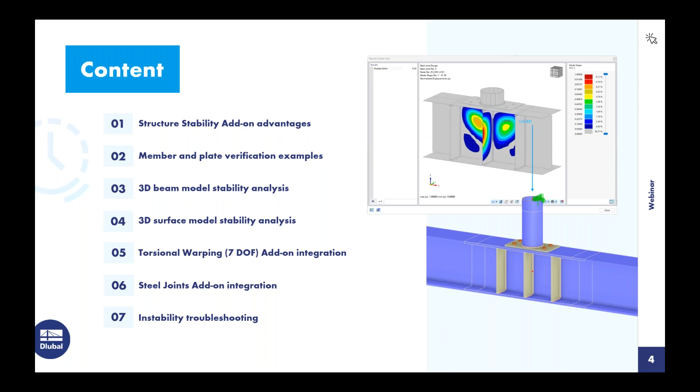To begin, when looking at the structure stability, this is an optional add-on within the RFEM 6 program. This allows us to run an eigenvalue analysis to determine the critical load factors and eigenvectors, or in other words, the buckling modes of our structure. Therefore, we can evaluate the stability of the structural system and regions prone to buckling. So when we're talking about regions prone to buckling, we're typically referring to very slender beams or columns, or thin-walled shell or plate elements.

Everything that we'll be carrying out today will be according to a linear eigenvalue analysis, which we'll talk a little bit more about in the next slide. But keep in mind that a nonlinear stability analysis is also available, where we can increase the load increments to see the failure of the structure. As already mentioned, not only can we look at the buckling modes of the structure, but we can carry out instability troubleshooting to locate modeling errors with a load-independent eigenvalue analysis.

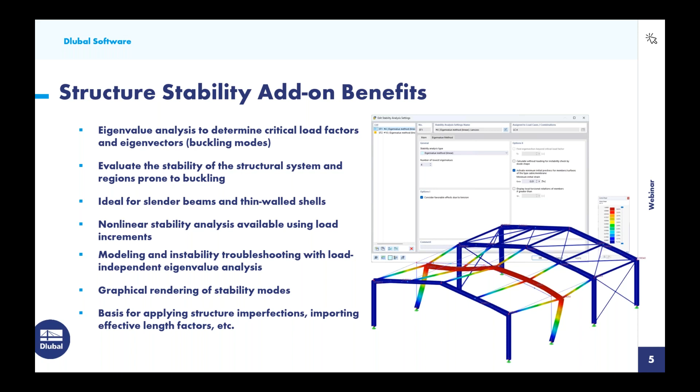Through all of these examples we'll see, we'll see the graphical rendering of the stability modes as we see over here on the right-hand side. Then we can integrate for further capabilities within the static analysis, such as applying structure imperfections. We can import effective length factors, and we'll see those carried out in the further design examples.

Now, when we do activate this add-on, we have 3 analysis types available to us. The first is the eigenvalue method, or a linear analysis, and this is essentially where the buckling modes are determined through a linear method. If we have any nonlinearities defined, either material or geometric nonlinearities within the model, these are internally converted to linear elements in order to carry out the stability analysis with constant stiffnesses.

Now, alternatively, we do have the incremental method with an eigenvalue analysis. This is nonlinear and will take into consideration all geometric and material nonlinearities. Essentially, we will carry out the failure criteria and nonlinear effects, and these will be included during the incremental loading increase. We will find the last stable state with this nonlinear analysis to carry out the linear stability analysis, or the eigenvalues.

The third option here is the incremental method without the eigenvalue analysis, also nonlinear. This is identical to option number 2 with those nonlinear analysis capabilities—we simply won't carry out the eigenvalue analysis within that last stable state. So with all of our examples today, we will be utilizing the linear eigenvalue method, but just keep in mind, if you do have those nonlinearities, the add-on is also capable of utilizing these nonlinear options.

So as we look at this example within RFEM 6, our main base program, we can see this W section profile with the 100 kip load applied at the top, the pin-roller scenario, 12 feet high. We want to activate the structure stability add-on, which we can do within our toolbar by accessing our base data, or by right-clicking on the model name to access that base data dialog box. Under the second tab are all of our available and optional add-ons, and for today we're going to be utilizing the structure stability add-on.

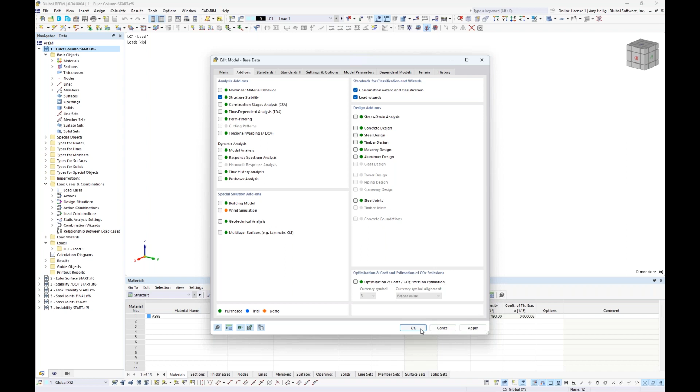When I click OK, pretty much nothing changes within the model itself, but we can go into the load cases and combinations dialog box. I currently only have one load case defined with that 100 kip load applied at the top of the column, and this will be carried out according to a first order static analysis. But we can activate the structure stability add-on with this checkbox down here at the bottom.

Looking at the default definition types, you'll notice there are two definition types immediately set. The first is an eigenvalue method linear analysis, which we should recognize from the PowerPoint. We'll go ahead and carry out that linear analysis for today, and then we can set the number of eigenvalues to solve for. The default is 4, but we could increase or decrease this manually depending on our model. The second default setting is identical, just with a higher number of eigenvalues set to 10 by default. So carrying out the linear analysis with 4 eigenvalues, we'll go ahead and click OK.

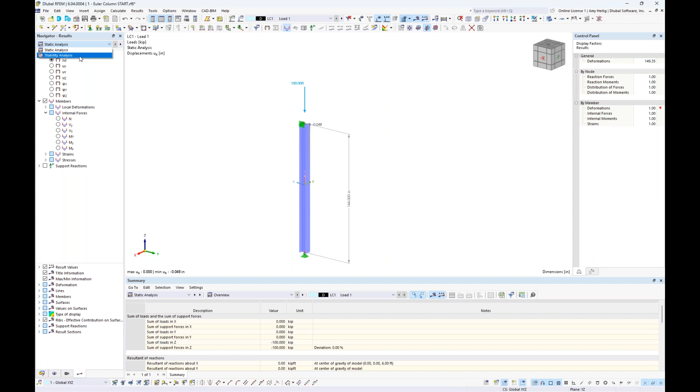To run this calculation, we're going to initially calculate the static analysis with this first load case, but then you'll notice we carry out the second calculation for the stability analysis. We're not so interested in the static analysis results; instead, we jump immediately to the stability analysis results now available to us in our navigator. When we look at the results here for the structure stability add-on, we see 4 different eigenvalues that we have solved for, and within the table we also see the critical load factor given.

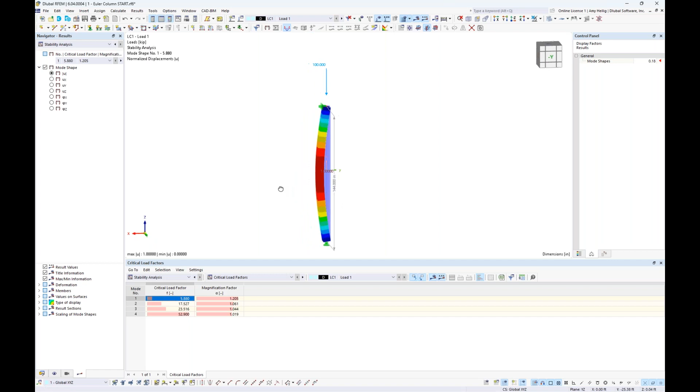The critical load factor for this first buckling mode shape, which we can see is buckling out of plane in the weak axis direction, is the factor that we can multiply the applied loads by—in our case, 100 kips—before we see the structure fail, as shown here with this first buckling mode shape. The second mode shape is buckling in the strong axis direction, and as expected, we see a higher critical load factor of 17.527. Again, we multiply this factor by the 100 kip applied load to determine the critical buckling load.

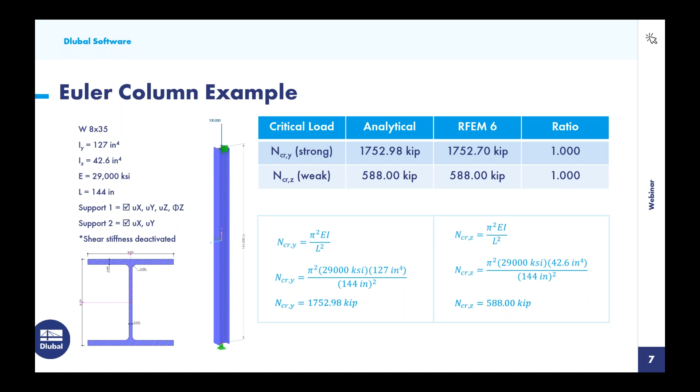So we take this information back to the PowerPoint to compare to the analytical calculations we've carried out within this slide. We can see that compared to the Euler buckling formulas, the RFEM 6 comparison gives us a ratio of 1.0. So I think it's important to understand how we're carrying out this structure stability for simple flexural design here for the stability modes.

Moving on to our second example, this is really very similar to what we just saw with our column, yet this time I wanted to utilize a 2D surface element. Members by default are represented by a single line element. Surfaces, on the other hand, are two-dimensional.

So we go into RFEM here to open up this example. And as mentioned, this is a two-dimensional surface, so we have 10 inches wide, 50 inches tall. I have left on the display here of the FE mesh, so you can see how the structure will mesh this for this two-dimensional object. We also have a 1 kip per inch load applied at the top here.

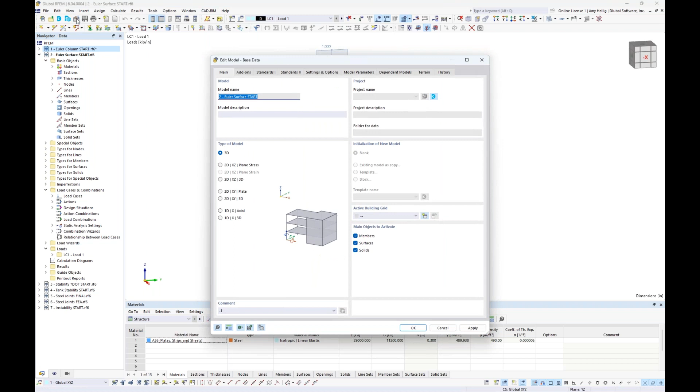So very similar to the column, we want to go into the base data, and we can do so within the toolbar directly to activate, under this second tab, once again, the structure stability add-on. We go into our load cases and combinations, and for this example we have our single load case here with the 1 kip per inch applied as a line load at the top of this 2D surface element.

We want to not only carry out the static analysis, but also the structure stability analysis. We'll go ahead and leave these default settings here for a linear analysis, carrying out 4 eigenvalues, and we can run this calculation. So the program would initially mesh a structure if we didn't already have it. It will carry out the static analysis, and then we move on to the stability analysis.

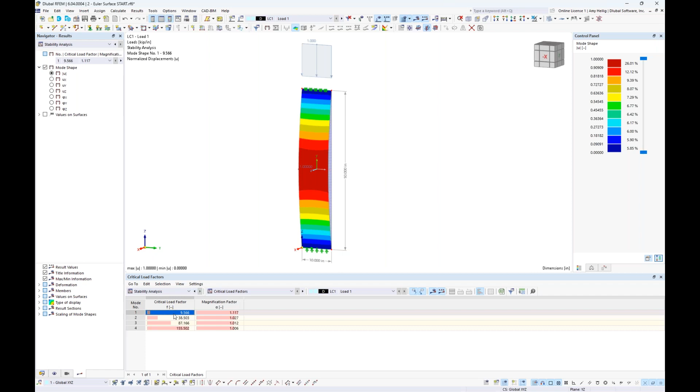So taking a look at our stability analysis results here within our dropdown, we see our 4 different mode shapes. The first mode shape you can see here is buckling out of plane for this 2D surface element, with a critical load factor of 9.566. Taking a look at these additional mode shapes, we can see the deflected shape, but the critical load factor here is much higher.

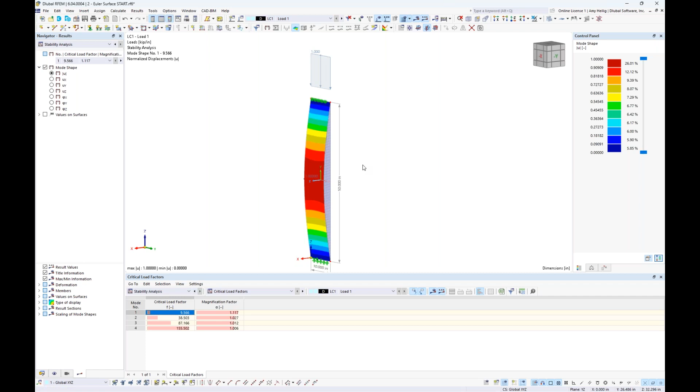So in reality, we're most concerned with the lowest critical load factor. Again, this factor, 9.566, is what we can multiply the applied load of 1 kip per inch by before we would expect to see structure failure, or the buckling here out of plane.

Again, we take this information back to the PowerPoint here to compare to the analytical formula, and we find a ratio of 0.997. Okay, so that should give us a better understanding of the basic behavior of this structure stability add-on for a simple beam and a simple surface.

Now let us go back into RFEM here to open up our third example. This one should be a little bit more interesting, where we have a 3D structure that is composed entirely of beam elements. So you can see that all of these are member elements for our columns, beams, and braces, represented by a single line element here. So no surfaces for this particular example.

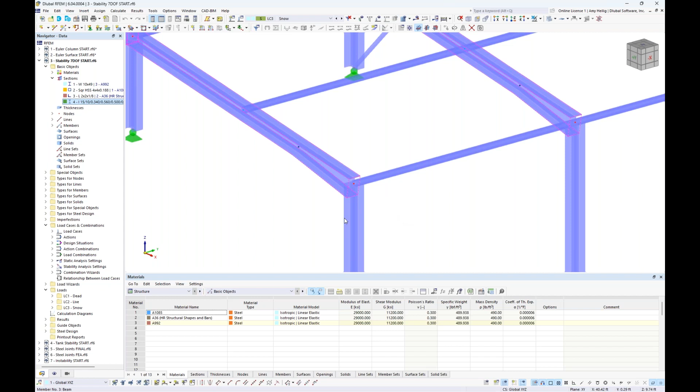If we want to do a quick overview, the cross sections are from the AISC database. So we have W10 by 49s. We have some square HSS sections spanning between these moment frames, single angles for our cross braces here, lateral bracing. And we also have a very small taper for this beam member, in particular at 25% of the member length before it frames into the vertical columns.

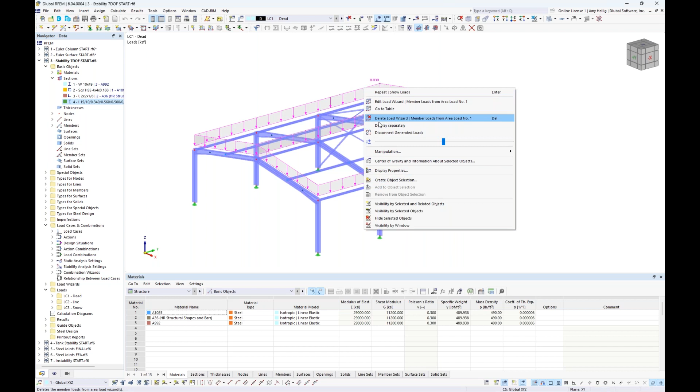Now, to quickly take a look at the loading for this example, I have only 3 load cases defined. So we can view these loads here, and these are just general area loads created with the load wizard for dead load. If we're curious to see how the load distribution looks, we can right-click to display separately, and notice that I have created a one-way area load distribution so that the loads are mainly on these main beams here rather than the HSS spanning in the global Y direction.

We can also view here the live load, same concept. If we want to view the area load instead, we can see this shown here on the structure with a varied magnitude.

And finally, we have a projected snow load in the vertical direction. So for this example, I have applied only gravity loads. I think it's important to understand that when we're talking about the buckling behavior of our structure, we want to evaluate the worst case scenario where we have the highest compression forces in our members. For example, in our column elements, we want to see the highest forces acting in the downward direction. This is typically with gravity loads.

If we were to include wind uplift forces, this is only going to do us additional favors in terms of the buckling behavior, because now we have introduced additional tension forces in those members. So again, when we are evaluating the structure stability, we really want to look at those downward compression, possibly gravity only loads. I have additionally combined these load cases into load combinations according to ASCE 7.

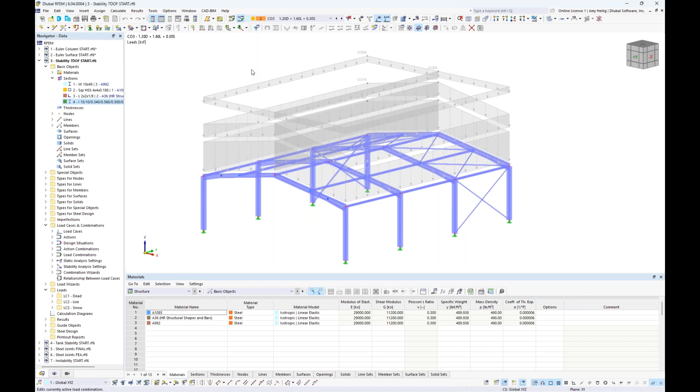We can see those displayed here graphically along with the relevant load factors. I'm going to go into my load cases and combinations. Now, we certainly could activate here the structure stability for each individual load case, as we did in our previous simple examples. But instead, I'm interested in carrying out the buckling analysis for my load combinations instead, where I have combined all the load cases together.

Now, the program by default creates 2 design situations based on the ASCE 7 2022 in this example. You can think of a design situation as simply grouping together all of our factored load combinations. We can see this here, LRFD according to the ASCE 7, as well as our second design situation, which groups together all of our unfactored load combinations. This will eventually give us an envelope solution for those factored and unfactored load combinations together.

Under the combination wizard settings here, I can go in and you'll notice that everything is solved here for our load combinations according to a second order analysis, but we have the ability to activate the stability analysis here directly within the design situation. These default settings are identical to what we saw previously within the load cases, that we can carry out the linear analysis, and perhaps I increase this to 10 different eigenvalues to solve for this structure.

So now that I have activated it within the design situation itself, I take a look at the load combinations individually listed out, and I can see now by default that the structure stability add-on is activated here. That's just simply because I have activated that checkbox under the design situation itself. Now, by all means, we can come in here and individually carry out the structure stability for each individual load combination as well.

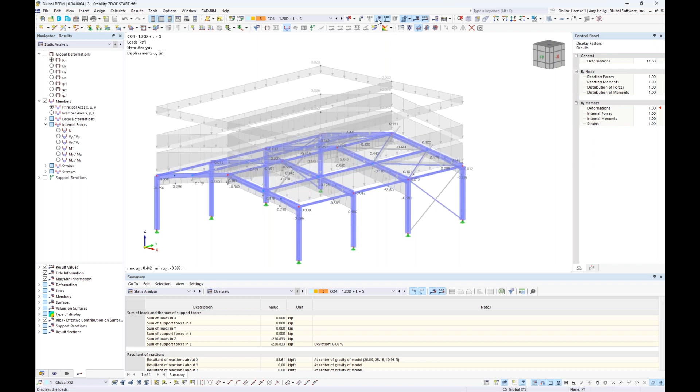So when we toggle this drop down to the design situation for our factored load combinations, again, this is nice because it's more or less an envelope solution for the static analysis. But you'll notice within this table here that shows our static analysis results for this design situation, we have the stability analysis envelope solution as well.

The minimum critical load factor is 10.532, and the controlling load combination is load combination number 3.

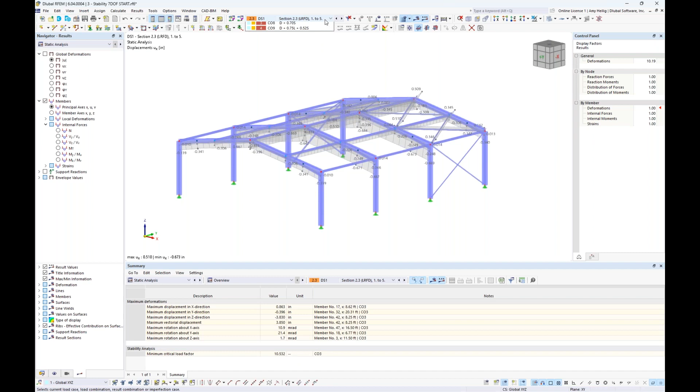So this is kind of nice that, again, we don't need to run each individual stability analysis for each load combination and to manually check the results, but the program will give us the controlling load combination here. So we toggle down just to display the loads for load combination number 3, and no surprise, this is certainly going to be the controlling case because we have all 3 loads activated with the highest load factors to give us the greatest compression forces in our members.

So we will toggle down to the stability analysis results for load combination number 3. As we have input into the program, we had solved for 10 different mode shapes. Starting with mode shape number 1, we kind of see a racking here of this initial moment frame with a critical load factor of 10.532 as we were shown here within the design situation itself. Essentially, we're going to see here the flexural buckling in the strong axis direction of these columns.

Looking at some of the additional mode shapes, we can see similar behavior just in different locations of the structure with a higher critical load factor. As we continue to increase, we may start to see more localized mode shapes. What I mean by this is where we see the individual buckling of these columns, in particular in the weak axis direction. Whereas compared to the mode shape before, this is maybe more of a global mode shape that kind of affects the structure together.

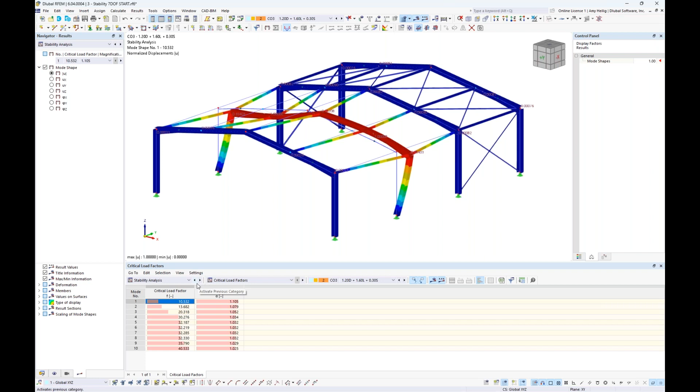Okay, so now that we are looking at mode shape number 1, let us focus in on this particular column here, and this is member number 10. When we are looking at the stability analysis results within the table, we can use this drop down to view the results by member. So when I graphically click on this member here, the table updates to show me member number 10's results.

We have 10 different mode shapes shown here. In particular for this first mode shape where we have failure of this column in the strong axis buckling, we can view the equivalent effective length factor, that K value, which is given as 3.012 in the strong axis direction. We also see here the effective length of 34.64.

So if we plan to take this a step further and to design this structure, let's say according to the AISC or the CSA standard, and in particular according to the AISC, we want to design it utilizing the effective length method. The effective length factors are really important. So we have the ability to get that information directly from the failing mode shape here.

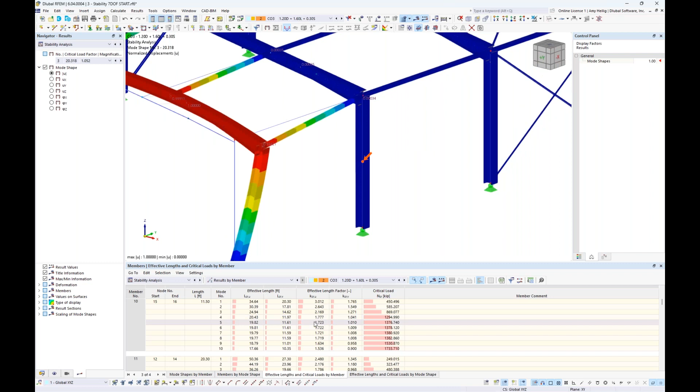Now, when I take a look at these additional mode shapes, they're really not affecting member number 10 until I get down to mode shape number 7. Here we see the failure in the weak axis direction for member number 10. We see the relevant effective length factor in the weak axis direction given as 1.008 and the effective length as 11.59.

So assuming that we have already activated the steel design add-on within RFEM to carry out the steel design according to the AISC, information such as the unbraced lengths or effective lengths are always needed in order to carry out that design. And we do so by inputting the effective length for the member directly.

And I want to show you a nice feature here that, assuming again that we're carrying out design according to the AISC with that steel design add-on, we input our first effective length definition where you have the ability to import from the stability analysis. So when I turn on this checkbox, I get a new tab here where for the strong axis direction, for consideration of, if we go back here to the main tab, flexural buckling about the major axes, we can import that effective length factor directly from the stability analysis.

So we choose here load combination number 3. We will choose mode shape number 1, and we can either graphically select member number 10 or choose it here within our dropdown, and notice that that effective length factor is automatically brought in as 3.01.

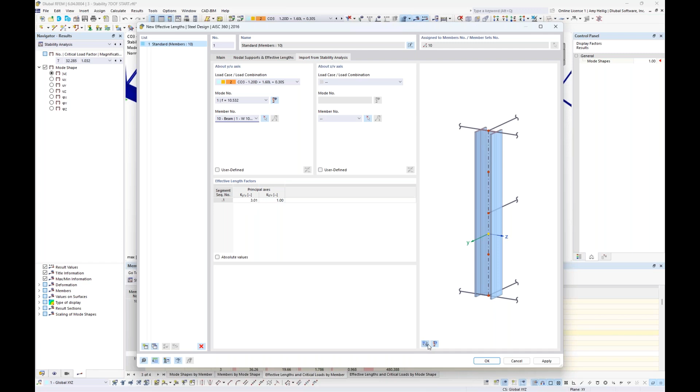We can do the exact same thing for the weak axis direction. Again, this is specific for member number 10. We will choose load combination number 3, but this time we want to choose mode number 7. Remember, that was where we saw this column fail in the weak axis buckling direction, again for member number 10. We see that effective length factor brought in automatically as 1.01.

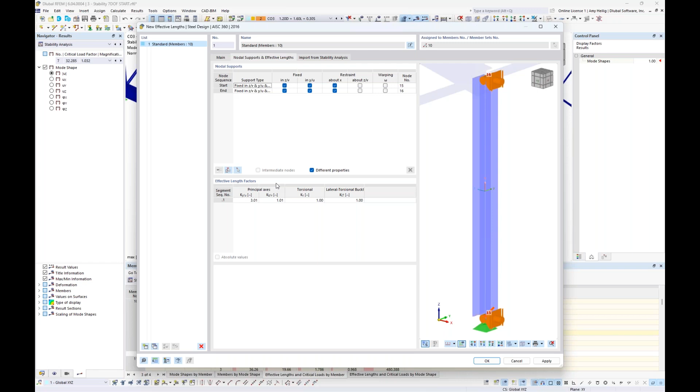So we don't need to do anything further here in terms of the effective length definition for flexural buckling in the strong and weak axis direction if we integrate this with the structural stability add-on.

Okay, so now that we have covered the basic stability mode shapes here, keep in mind that everything that we have seen so far has been based on 6 degrees of freedom. And with 6 degrees of freedom in these various mode shapes, we notice that we're really only able to consider flexural buckling. We certainly can see this with the mode shapes directly with flexural buckling failure of the columns themselves.

But if we back up a step to look at the static analysis results or the internal forces from load combination number 3, what we'll actually see here is that we have pretty high bending forces along the length of our members. And when we look at our columns, we have pretty high axial forces, of course. When we're talking about these bending forces, for example for these beams, this should immediately flag us that possibly lateral torsional buckling is an additional stability failure state that we need to consider.

So let us go back to the PowerPoint here to discuss these different stability failure modes. Now, we should be very familiar with flexural buckling by now for our members. Ultimately, there's some critical buckling load for the strong axis and the weak axis before we see this member fail with flexural buckling.

But there are also additional failure modes such as torsional buckling, which has some other critical buckling load factor before we would see this member twist about its longitudinal axis. This might be quite common for something like a cruciform section.

Then we also have flexural torsional buckling. When we have an applied axial force to the member on something like a single angle that's unsymmetric, we're not only going to see flexural buckling, but it's also going to be twisting about its axes.

And of course, lateral torsional buckling is also a consideration when we have a bending moment along the length. So something like singly symmetric or unsymmetric sections, we're not only going to see it move out of plane, but also twist about its own axes. The problem is that 6 degrees of freedom can only consider flexural buckling.

Now, we can go ahead and say, well, if we are designing according to AISC or CSA, the codes have analytical equations that are going to design for these additional stability failure modes. But this is in the design process. What I'm talking about specifically is the static analysis as well as the structural stability.

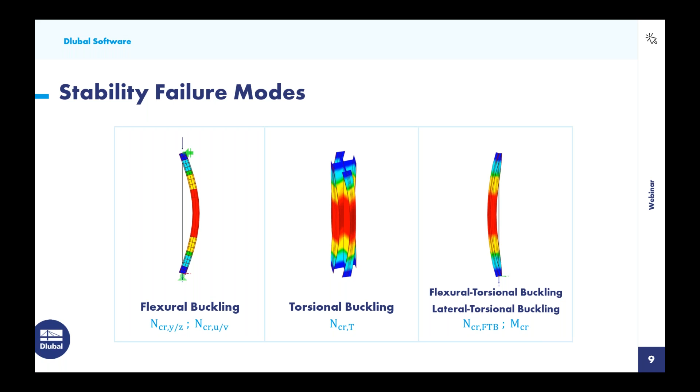So how do we consider these additional failure modes? The answer is to enable the 7th degree of freedom, or warping. We have an additional add-on within RFEM 6 called Torsional Warping 7 Degrees of Freedom. This allows us to consider the cross-sectional warping with an additional degree of freedom for member calculations.

What's nice is that everything is integrated automatically, including both the static analysis and the structural stability add-on, to determine additional member critical load factors and mode shapes. Again, 6 degrees of freedom can only consider flexural buckling failure. That's everything that we have seen up until now.

I did want to put a quick note here that also with 6 degrees of freedom, the load application is always at the member shear center. So now when we enable that 7th degree of freedom, we can additionally capture the torsional, flexural torsional, and lateral torsional buckling behavior. And when we do enable that 7th degree of freedom, we get a load application at the center of gravity, or centroid, of the member instead. What we will see in just a minute is that when we do enable this add-on, we get additional options available to us, such as member transverse stiffeners to restrain the warping along the member length.

Now, currently in RFEM 6, the 7 degrees of freedom is not linked in the steel design add-on when we're carrying out steel design according to AISC or CSA.

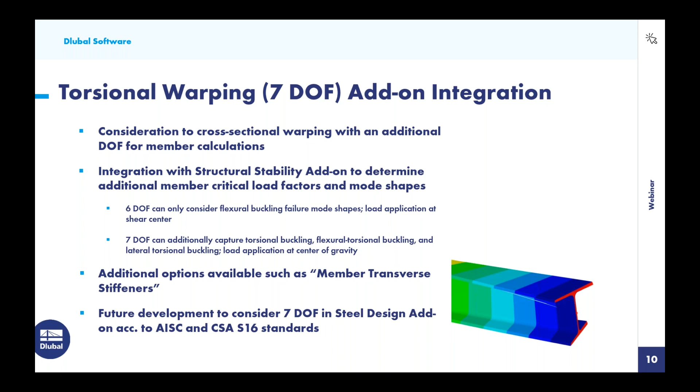Okay, so what we will do here is go back to the RFEM model, and we want to go into the base data here. Under the second tab, we will activate now not only the structural stability, but the torsional warping 7 degrees of freedom. When I do this, the program says it needs to delete the results, of course, because that was all based on 6 degrees of freedom.

Now, by default, all of our members are considered free to warp. There is no warping restraint along the member length. In addition, if you would like the warping internal forces to be transferred to adjacent members, it's important here to create what we call a member set.

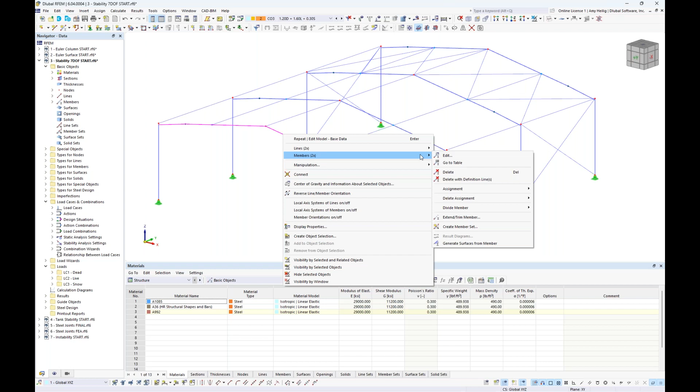So what I mean by this is that if we want the warping forces with the 7th degree of freedom to be transferred from, let's say, our beam on the right over to our beam on the left, we would need to hold down our control key to make sure both are highlighted here. We right click, and under the member option, we have the ability to create a member set. So that's just simply grouping those members together so that those warping internal forces will be carried out to adjacent members.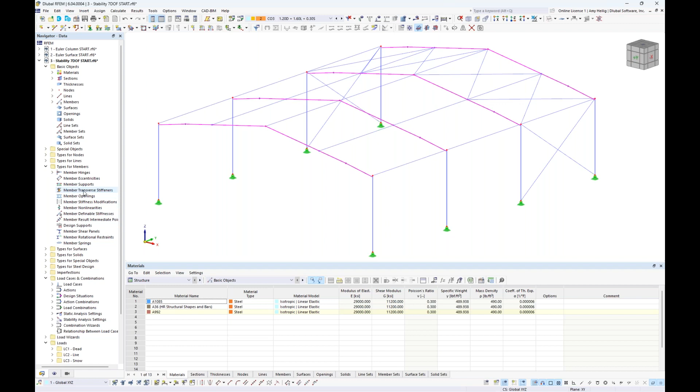Now, circling back to the warping restraints, we should see now under types for members, we have a few additional options here, including member transverse stiffeners. So I'd like to double click on this to create a few stiffener types for these members in order to restrain the warping at the member start and at the member end. And within this dropdown, we actually have several different stiffener types.

For example, we can choose a flat plate where we could input the material and dimensions, and the program will automatically calculate the warping spring to be considered within the analysis.

For today, we will use this option at the bottom called warping restraint, where we use the full warping restraint, and apply this to the member based on a certain percentage of the length. So I'm going to activate this warping restraint at 0% of the member length, the member start, and add a second warping restraint at the member end, at 100% of the member length.

Then we can graphically select which members we'd like to apply this warping restraint to. I'll use my selection box to graphically select all of those main beams, then click OK. Once I click OK through this dialog box, you'll notice we get a nice symbol shown here representing where that warping restraint is located at the member start and the member end.

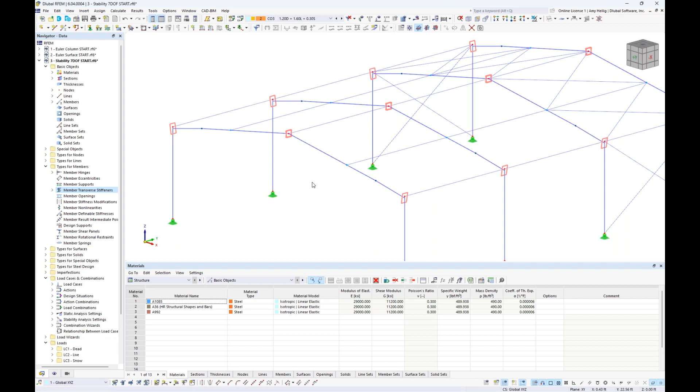Now we want to go to Calculate All, and we have to rerun the static analysis with 7 degrees of freedom. So we see the load cases carried out, but also those load combinations according to a second order analysis. Then we run through the structure stability again for all load combinations, and we should see slightly different results.

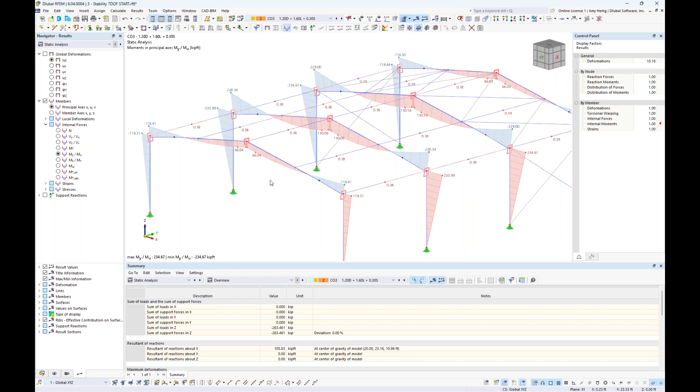Taking a look at the static analysis results, where we can view the internal forces of our members, you'll notice we have a few additional options now with that 7th degree of freedom. For example, we can view the warping moment along the member length, or the primary torsional moment and the secondary torsional moment. This previously was not available with 6 degrees of freedom.

Toggling down to our stability analysis, we also should see pretty significant or different results here as well. No longer do our 10 different mode shapes look like what we previously saw with 6 degrees of freedom, but we see here the critical load factor is now...

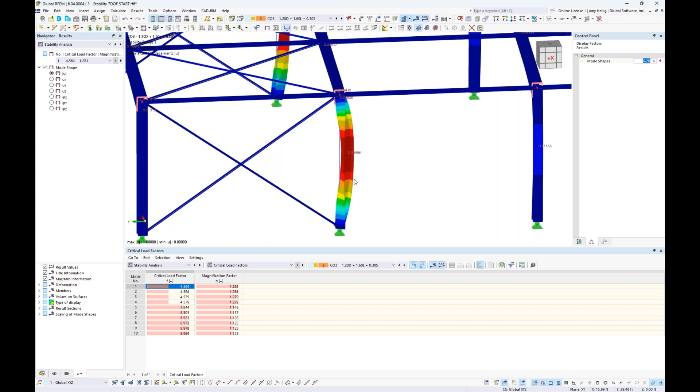4.564, and our relevant mode shape is really focused here on these columns. We can increase the size of this mode shape ever so slightly to see how this column has essentially flexural torsional buckling, where it is both bending out of plane but also twisting about its own axes.

So you can see that with the critical load factor, it's significantly decreased. Previously it was around 10.5, and now it's only 4.564 before we go on to see the relevant mode shapes here.

Now, when we look at these first four mode shapes, it's really flexural torsional buckling of these columns, but then we get into mode shape 5 with a critical load factor of 7.84, and this is where we begin to see lateral torsional buckling of those beam elements themselves.

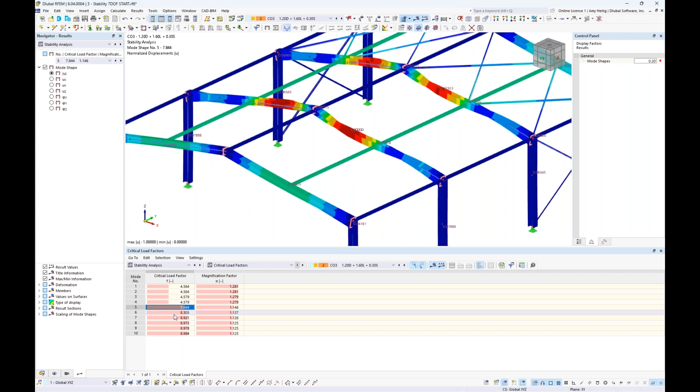So again, when we are carrying out 6 degrees of freedom, if we're only concerned with flexural buckling, no problem, the program automatically considers this. But if flexural torsional buckling, lateral torsional, and torsional buckling are also a concern, then we really would want to consider enabling this 7th degree of freedom.

All right, so this should give us a pretty broad overview now of member stability design. I now want to move into our next example to talk about surfaces.

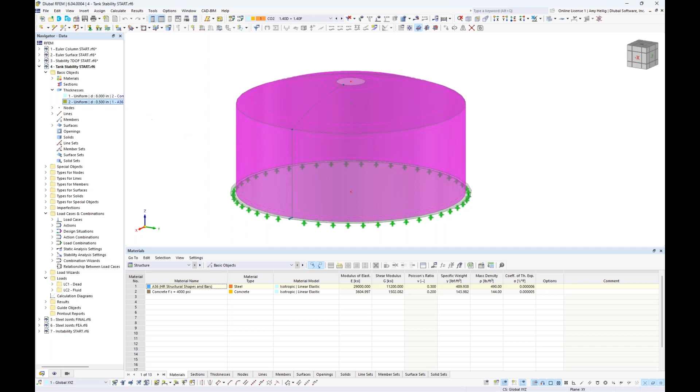You'll see here that I have a tank model, and everything is composed of 2D surface elements. So the tank wall is a surface element, as we see here, as well as the tank roof. The entire tank wall and roof are going to be comprised of half inch thick A36 steel material, and at the bottom here we have an 8-inch concrete slab, 4,000 PSI concrete.

I did want to point out that this structure was entirely created using our block options up here in the toolbar. When you take a look at the various block options, you'll see all the different categories for the different structure types, including silos and storage tanks. Within these options, as I cycle through them, you'll see all of the various options, and if I double click here, I have the ability to define the dimensions, the material, and even some loading capabilities are automatically created. That is how this example was created automatically.

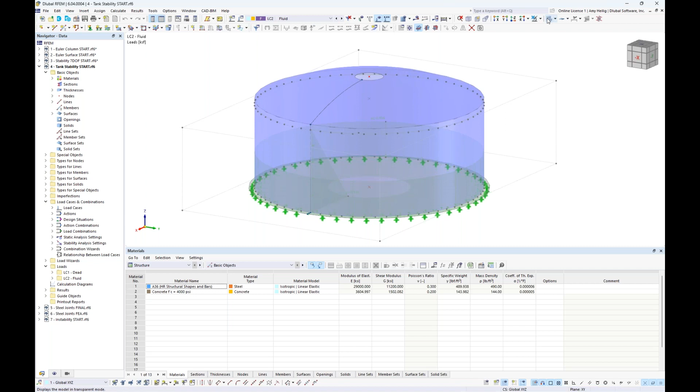For this example, we have only 2 load cases. We have a simple dead load where only self-weight is active, so no additional loads apply to this tank structure. Then we have this fluid load, which was automatically created with the block import option to represent fluid inside the structure acting with outward pressure against the tank walls.

We also have a downward pressure acting at the base for the concrete slab. So I've left this with only these 2 simple load cases because for load case number 2, the fluid load, we get pretty significantly high compression forces in our tank wall to carry out the buckling analysis.

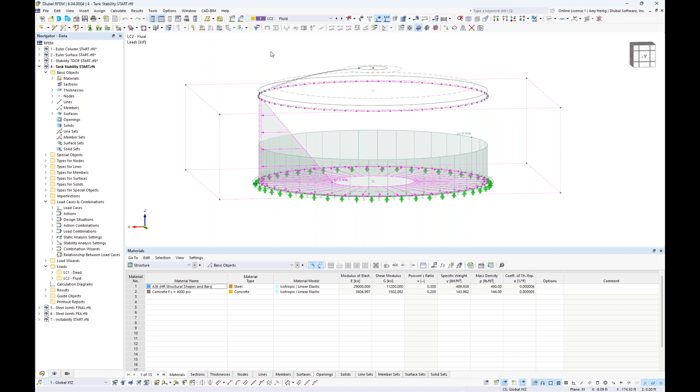So I want to go into the load cases and combinations dialog box, and we want to carry out the structure stability analysis here. A linear analysis with 4 different eigenvalues is fine for this particular load case number 2, the fluid load. When I calculate this, the program will generate the FE mesh for our tank, run through the static analysis calculation, and then run through the structure stability analysis for those 4 different eigenvalues.

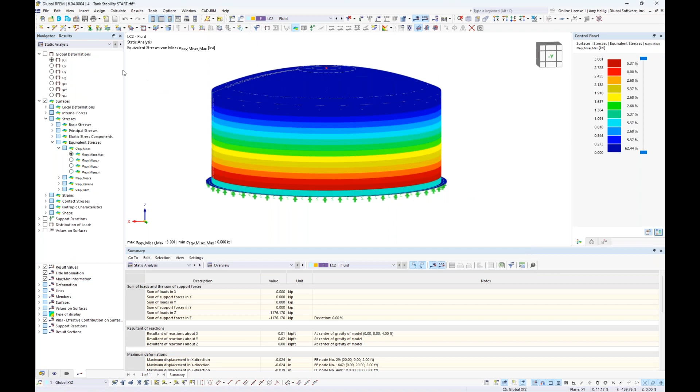Once this is done, we will see under the stability analysis the relevant buckling shape. I'm going to create a user-defined visibility here for only the tank walls, so we can see this in a clearer form. And we have 4 different mode shapes that we have solved for.

Notice that the critical load factor is quite low here at 2.882, and we see the relevant buckling mode shape—kind of these localized buckling modes all around the circumference of our tank walls. Now when I look at these additional mode shapes, the critical load factor is almost identical, around 2.8 or 2.9. Just notice that the location of these buckling modes has changed ever so slightly.

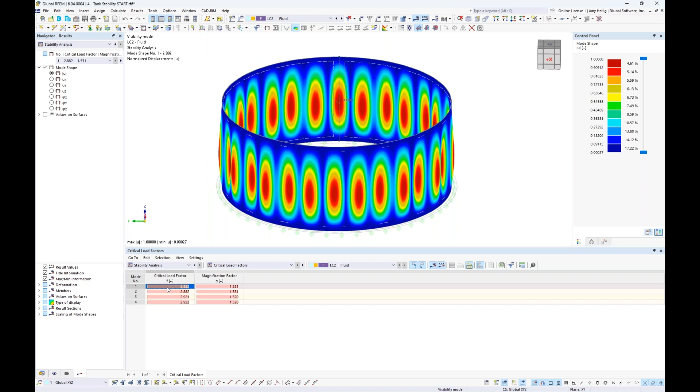So when we back up a step here to look at the structure in general, everything that we model in an FEA software is considered perfect. What I mean is that everything we've modeled assumes the manufacturing process is perfect, that when we install this structure out in the field it is perfectly aligned. But we know in reality that's never the case—there's usually some type of imperfection with the manufacturing and/or installation of these structures.

When we refer to the various codes, there are ways to consider these imperfections. One of them is to outright directly model the imperfection in our FEA model. So I'd like to show you now how we can directly model these imperfections and integrate it with the structure stability and that first buckling mode shape.

When we go back to the navigator here within RFEM, you'll see an option within the folder called imperfections. It should be known that imperfections is one of the available options in the base program—you don't need any additional add-on for this. But what we can do here is create a new imperfection case.

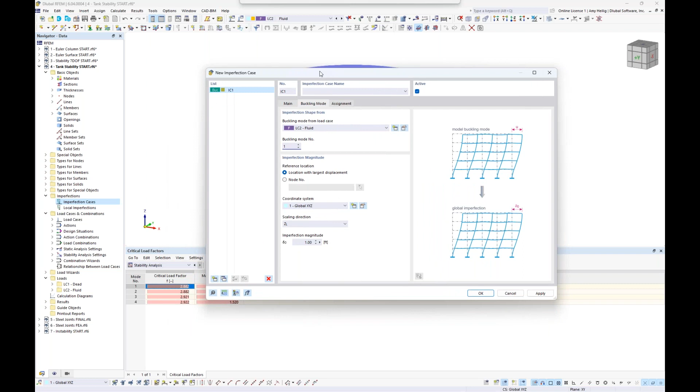Under the imperfection type, we can choose buckling mode. We can select either a load case or a load combination. If you remember, we carried out the stability analysis for load case number 2, that fluid load, and we can choose the relevant mode number 1. We can deform the mesh by scaling that mode shape.

So we see here the imperfection magnitude options down at the bottom, where I can import that buckling mode and scale it based on the X, Y, or Z directions. Now for our case, we have a round structure that's not necessarily in these global X, Y, and Z directions. So for this we also have the spatial option, where I can tell the program to scale that buckling mode shape by a specific value that I input.

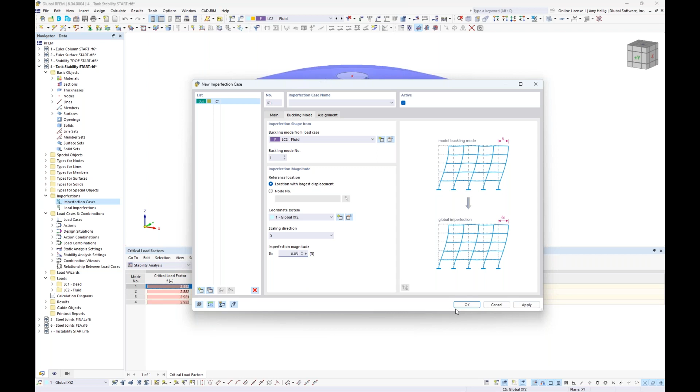So we put in something quite small, like 0.03 feet. Again, what I'm trying to replicate here is, let's say, a manufacturing defect where we know that this tank wall isn't going to be perfect. So I'm going to deform the FE mesh before I apply any additional loads to carry out the static analysis.

Now that we've created this imperfection case, we're going to go back to our load cases and combinations dialog box. Under the design situations, we should be familiar with design situations—we go back in here to edit the definition type. Remember, we're carrying out a second order analysis. We previously activated the stability analysis, but here you'll see an additional checkbox option to consider the imperfection cases.

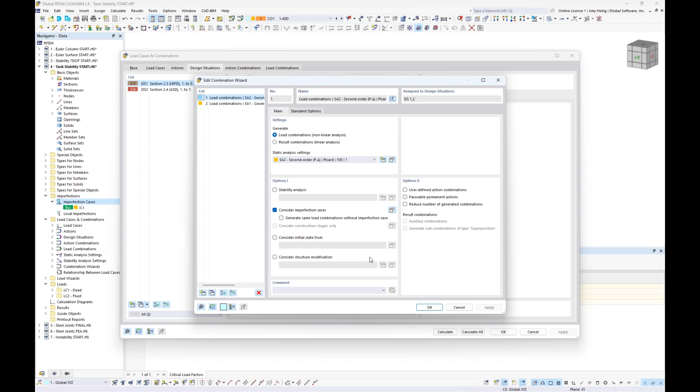This is typically by default always checked on. So now when we go to our load combinations individually listed out, we see this imperfection automatically considered. Again, when we take a look at load combination number 2 here, we are going to first deform the mesh based on that buckling mode and the scaled magnitude that I had put in.

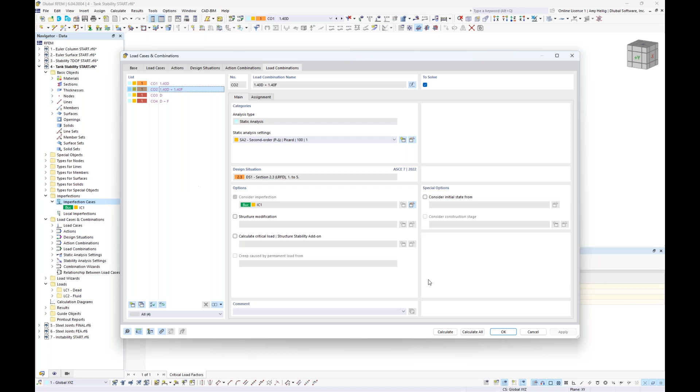Then we're going to apply the static loads, dead load, and fluid load to give us a full static analysis result. So we can go to calculate all just to see what our results look like with this imperfection now considered. Again, the program will carry out all of these load combinations according to a second order analysis.

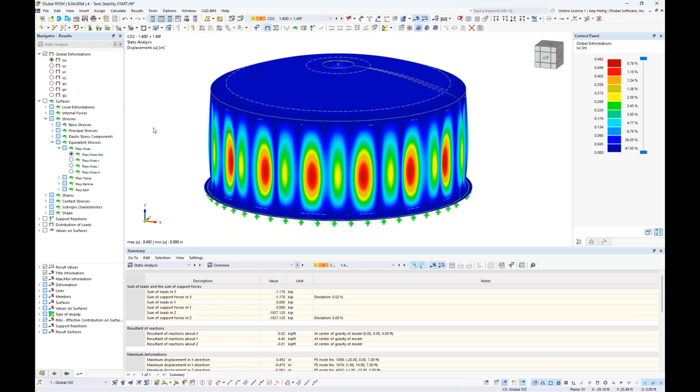So currently I am looking at load combination number 2, which is the dead load plus the fluid load. Sure enough, when I look at my deflected shape for the static analysis - not the stability analysis, but the actual static analysis - we see the deflected shape replicate those imperfections where we have directly modified that FE mesh.

In addition, we're probably also interested in the surface stresses, so we can activate here under our surfaces option, such as the von Mises stresses. Because of that deformed mesh, we're going to see slightly higher stresses at these particular locations where that deformed mesh is also applied.

So these imperfections can be really powerful in the sense of integrating with the structure stability add-on to outright model the imperfections, not only for surfaces, but we can also do so for members.

Okay, so jumping to our second to last example here, I am going to focus in on a much smaller scale for the structure stability. So now I would like to turn to talk about steel connection design according to the AISC. You'll see here that I have a very simple model, and this is all carried out with one-dimensional members.

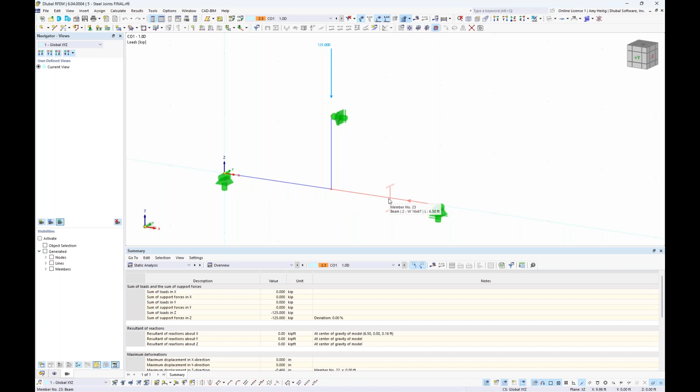If we turn this into wireframe view, and then go back to the rendered view, what we have here is a simple W cross section for our beam at the bottom. Then we have a vertical pipe member framing into this beam with a point load of 125 kips. I have activated our steel joints add-on.

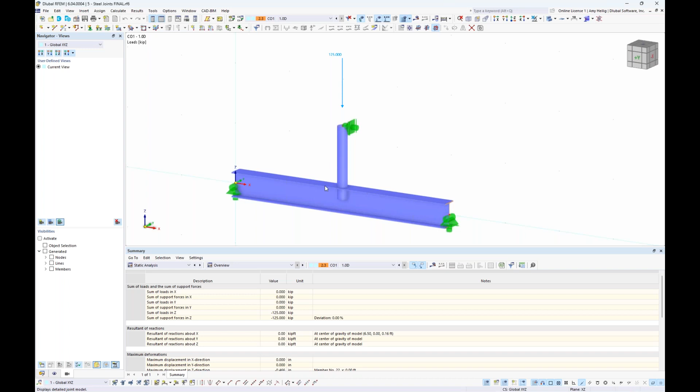This allows us to carry out the connection design according to the AISC. Now, I've already input all of this information directly for this particular node where these members are intersecting, and we can graphically see some of those components here.

Just to mention, I previously did another webinar devoted entirely to steel joint design, so I'd certainly refer you to that on our website and YouTube channel because we won't be able to cover everything in just a few minutes here. But the powerful thing about our steel joints add-on is that it creates an FEA model underneath the hood.

Meaning that any connection is possible. We are not just limited to standard connections carried out with analytical equations, but rather this is a pretty non-conventional connection here, and that FEA model is created underneath the hood to carry out the AISC design.

What else this allows us to do, which you'll see here under types for steel joints, is that I actually have 3 different scenarios for this connection design. And what I mean by this, if we go into the steel joint directly, is that my first scenario here is considering the connection with no stiffener plates.

Rather, we just have an end plate here that is connected by bolts to the top of the beam flange. We have our pipe member, which is welded directly to that end plate, but again, no stiffener plates.

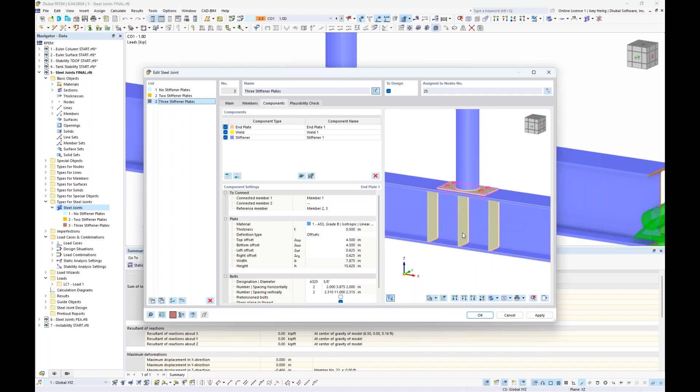Then I created a second scenario to compare where we have applied 2 stiffener plates. You can see that additional component added with the stiffener plates applied at the left and right of that end plate. And then I created a third scenario where we have that third stiffener plate applied right at the center where that pipe is framing into the W section.

So when we carry out the design here, we will go ahead and just open up the saved results. Of course, we're going to give you full design of the bolts, the welds, and the plates according to AISC. But we also have the ability to integrate with the structure stability add-on to carry out the buckling analysis of this connection.

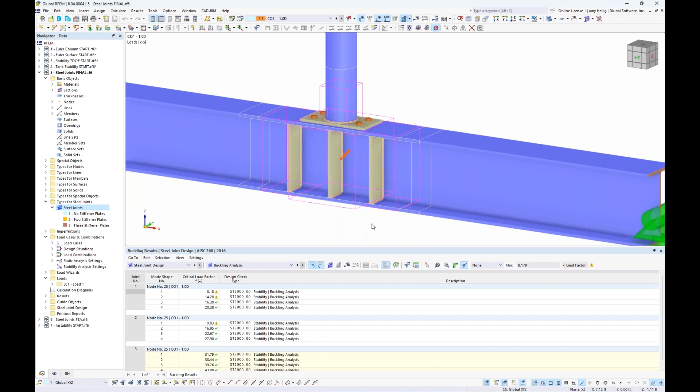For these 3 different scenarios, I see my buckling analysis results, and you'll notice that the critical load factor for the first scenario, no stiffener plates, is given as 8.18. And if we're further interested in seeing the buckling shape without any stiffener plates of this connection, we can go ahead and activate this option here in our toolbar to view the results in the steel joint.

So I can scale this mode shape slightly where we can see this FEA model that was generated underneath the hood, and the actual structure stability analysis was also carried out so that we see that buckling of the web is really a concern for this particular connection.

Now moving on to the second scenario where we have 2 stiffener plates, we'll notice here that the critical load factor is slightly higher at 9.83. Taking a look at the mode shape with 2 stiffener plates, we see again a concern of web buckling between these 2 stiffener plates at the left and the right.

Finally, we have our third scenario where we've added in this third stiffener plate, also shown here graphically. You'll notice that the critical load factor jumps immensely to 31.79, meaning we can multiply our loads by 31.79 before we need to be concerned with any type of buckling in this connection design. What you'll notice with the deflected shape here is that the stiffener plate itself is actually going to buckle before the web element does.

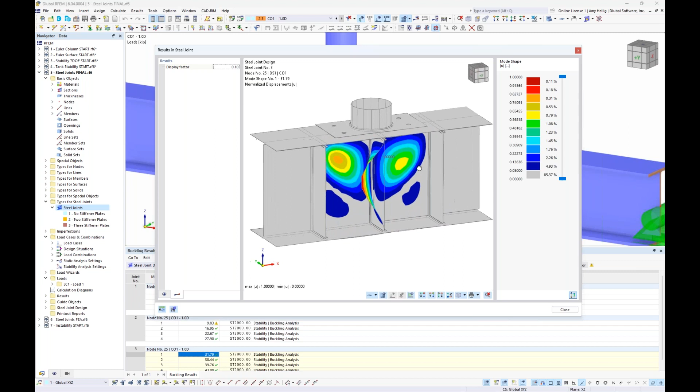So again, just these three different scenarios that allow us to see the buckling behavior integrated with that structure stability add-on. When you own both the steel joints add-on and the structure stability add-on, you by default have all of these results available to you. You also have the option in the lower left-hand corner to save the steel joint model.

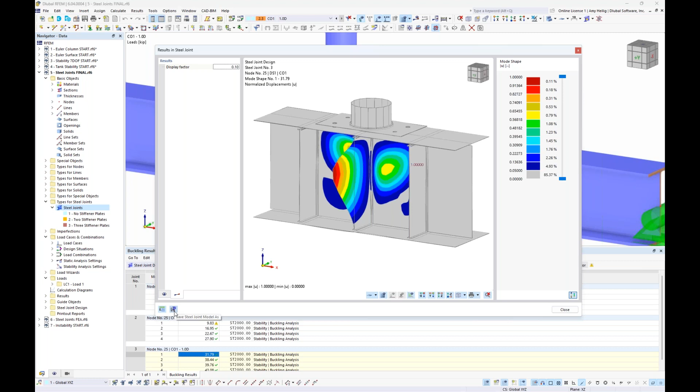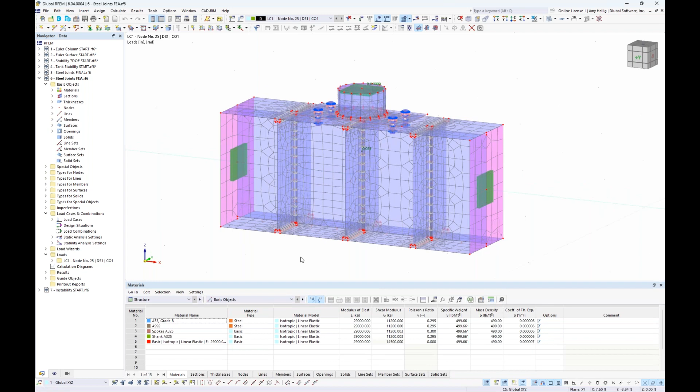What this means is that the program creates this 3D FEA model underneath the hood. I went ahead and saved that just to show you what's going on in the background. The bolts, the welds, all of the plate elements are created automatically by the program with this FEA model, in order to carry out the connection design. In addition to AISC design, we're also carrying out the stability analysis.

So every example that we've seen up until now follows the same workflow underneath the hood, where we can view under the stability analysis results 4 different eigenmodes, with a critical load factor of 31.79 before we see the buckling of that stiffener plate, and then also the relevant mode shapes here with slightly higher critical load factors, showing concern for the buckling of these web elements. So it's pretty unique and powerful, what's going on underneath the hood for any connection type, because of the ability to generate this FEA.

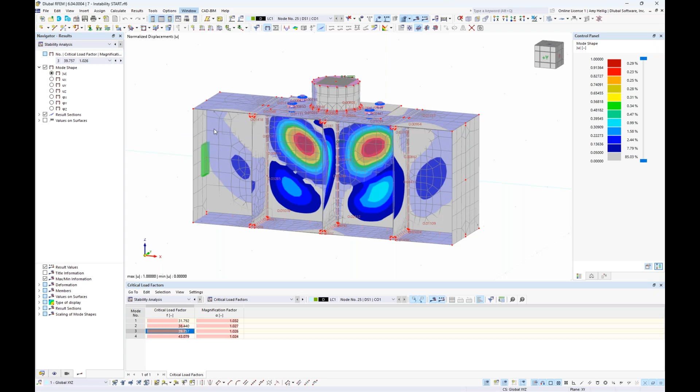All right, so the final thing that we want to go over here is instabilities. We'll jump to our last example, and no longer are we going to focus in on the structure stability or the mode shapes of our structure, but let's turn to the topic of instabilities.

Instabilities are not unique to RFEM; they happen in any FEA program. The question is, do you have the necessary tools to help you investigate where these instabilities are coming from? The structure stability add-on can be incredibly helpful with this topic.

So we have here a general steel structure, modeled with all beam elements, coming directly from the CSA standard this time, with W250 by 80 steel shapes, some HSS members, and so on. I also have various applied loads: the dead load applied here as an area load, snow load, and a couple wind loads in the global X direction and the global Y direction. All of these are combined into load combinations according to the NBC standard.

So again, not really focusing on the stability design, I just want to carry out the static analysis of the single dead load case. By default, load cases are run according to a first order analysis, so I go ahead and run this calculation.

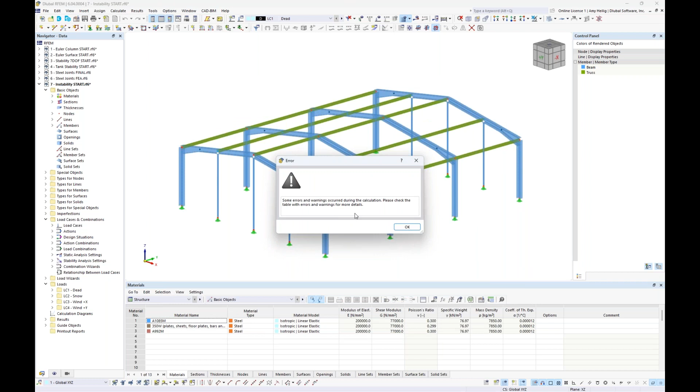What we find with this first order analysis is our first instability. We get a warning message in the program, and when we take a look at the table results down here, it tells us the stiffness matrix is singular — the structure is unstable in the direction of the global y-axis. This red arrow can certainly be helpful in cases where we have a modeling error, but if it's more of a global instability, the red arrow is really just pointing to a single FE mesh point anywhere on the structure, so it may not be as helpful in those cases.

If we've ruled out any modeling errors and we're really unsure why we're getting this instability, what we want to do here is go back to our load cases and combinations dialog box, just like what we've previously done to activate the structure stability add-on.

This time I'm going to go into the default settings to modify this to calculate the eigenvalue analysis without loading, for an instability check by mode shape. So this is a load independent eigenvalue analysis. When I click calculate here for load case number 1, for the static analysis, we're sure enough still going to see that instability.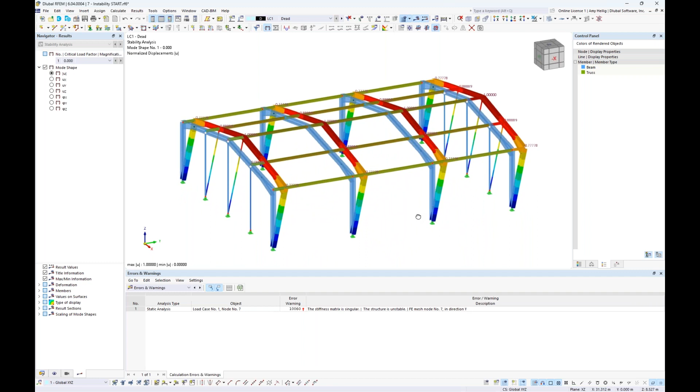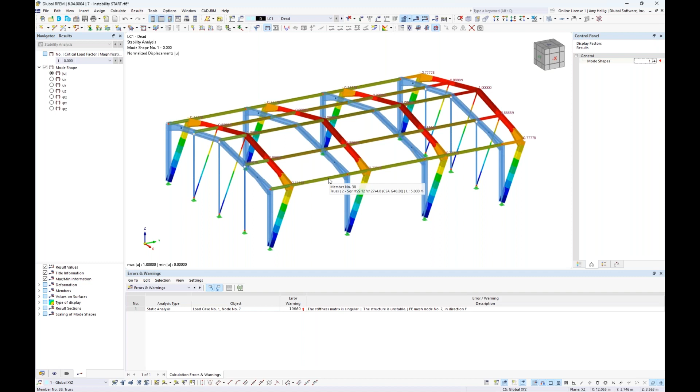But what we will also see now is the load independent eigenvalue analysis run, and we will begin to see what the problem is here with our structure. If I increase this mode shape deflection, we see that the structure is just free to hinge about its own axes in the global Y-axis, and that's simply because we have pin supports everywhere. These member ends are connected with pin moment ends, so we have no lateral bracing for this steel structure.

In order to resolve that, let us create a few members. I'm going to draw a new single member. The member type will be tension only for this lateral bracing, and the cross section will just be a single angle that I've already defined in the model. I'm going to switch to wireframe view where I can snap to this particular node, and the program asks me to clear my results, no problem. The program automatically detects these snap points to allow us to create this cross bracing for the last bay shown on the right.

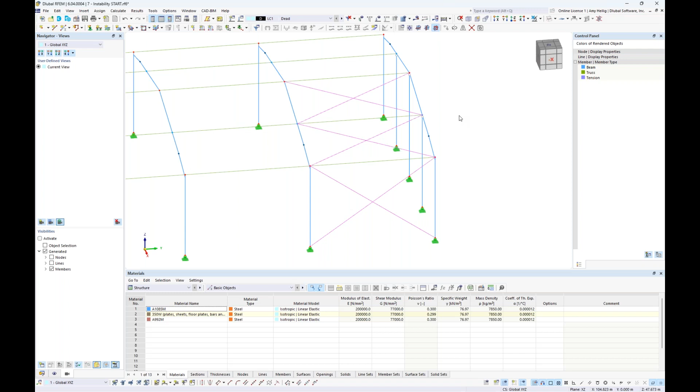Now that we have modeled this lateral bracing on the right-hand side of the structure, I can hold down my control key to select all of the elements. I can mirror this to create a copy about the YZ plane, and select my mirroring point at the top of the structure. Now we should see this lateral bracing applied at the left side of the structure in that last bay.

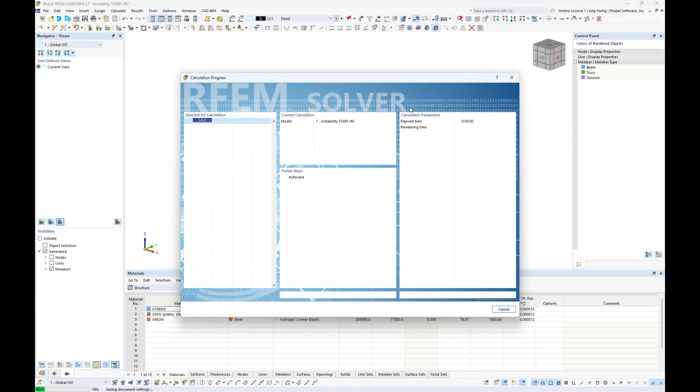So what we would hope is that we can go into our load case 1 to rerun this calculation. We'll cycle through the static analysis, and unfortunately, what we'll find again is another instability. When we take a look at this new instability error, it tells us the instability occurs here, where this red arrow is, around the global axis X. So again, we've kind of ruled out any modeling issues.

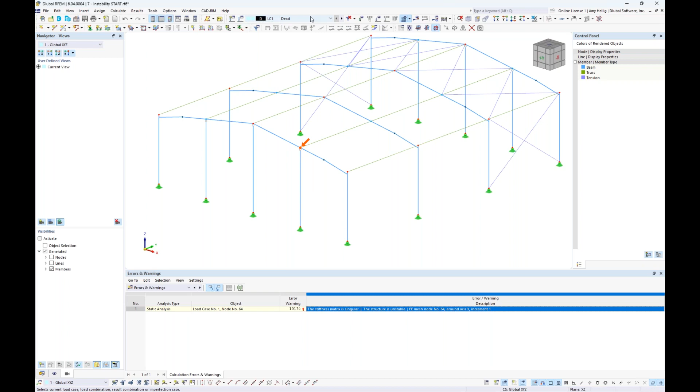We're not sure what's going on, but I have left that structure stability add-on active for load case number 1, so I can simply turn on my results here, and sure enough, I see what the issue is. It appears that this column is not connected to the rest of the structure. This red arrow is certainly helpful for identifying where that modeling error occurs. When I turn off the results and zoom in in wireframe view very closely, sure enough, I see that these two nodes are not connected.

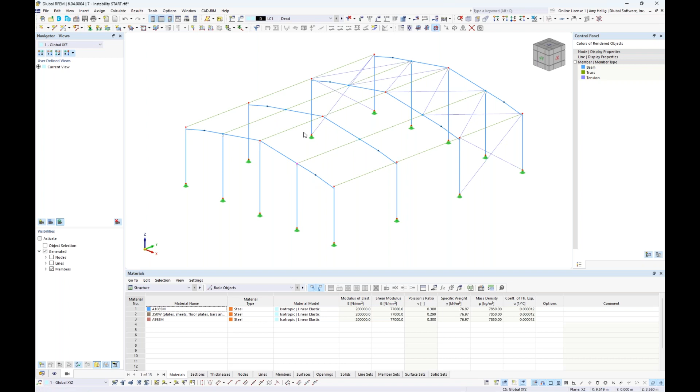So I can simply take this node and drag and drop it here to this other node connected to the frame. What we should see now is hopefully the dead load will solve with no more instabilities for this load case. Assuming now that everything is solving for first order analysis for these first few load cases, we want to drop down to a load combination.

I'll start off with this load combination here, dead load plus snow load. Keep in mind, this is always run by default according to a second order analysis. Again, my load cases solve fine, so we're moving on to load combinations. I'm going to carry out this calculation, and the program will attempt to run this.

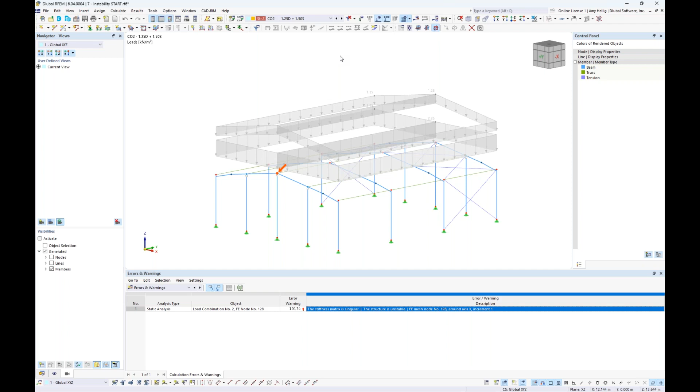What we should find here is our third instability. This time we can see the structure is unstable around the global x-axis. When I turn off the display of the loads here, we've really ruled out any modeling issues, because those load cases under first order analysis solve perfectly fine. So we know that nodes are connected, everything is fine there.

What I would suggest doing for instabilities under load combinations, since these are by default solved according to a second order analysis, is to change this to a first order analysis. In addition, we can activate this structure stability add-on, but I'm going to go into my definition type and carry out the standard eigenvalue analysis with 4 eigenvalues to solve for. We would hope then that load combination number 2 here, under first order analysis, will solve okay.

And actually what we see here immediately is that no errors are shown. The structure solves just fine under first order analysis. So what could possibly be the problem then with second order analysis?

I toggle down to my stability analysis results, and we immediately see what the issue is. The 4 eigenvalues that we solve for have a critical load factor of 0.67, with the relevant buckling mode shape for these very slender columns shown here. Anything under a value of 1.0 is always a problem. This means the structure cannot take on 100% of the applied loads in load combination number 2 before it's going to fail, as we see here.

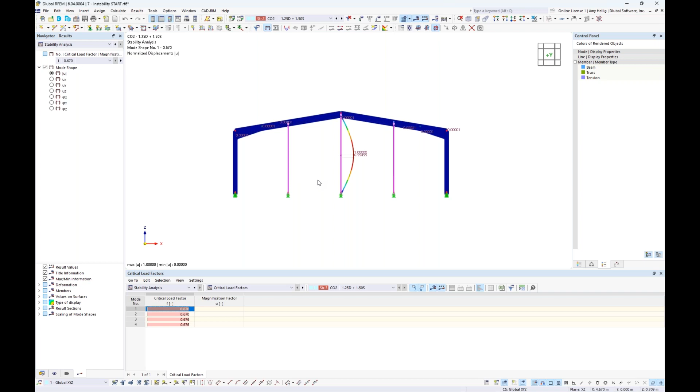If we take a look at the other relevant mode shapes, it really has to do with these slender columns. So clearly we need to make a change to our model because it cannot take on the applied loads. So we're going to select all of our vertical columns that are very, very slender. We'll go ahead and double click them, and under the section, we're going to modify this.

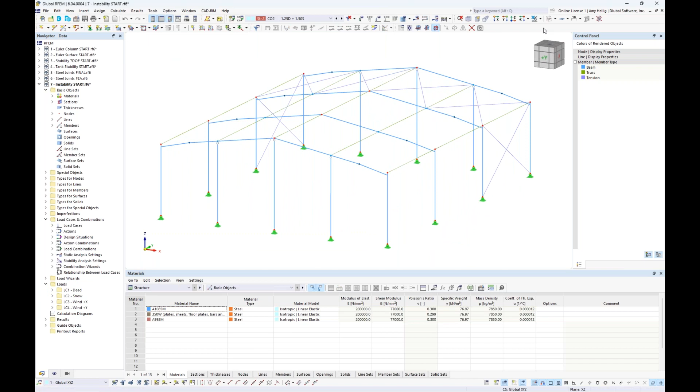Instead of an HSS 51 by 51, we'll change this to an HSS 127 by 127. So when we click OK, let's take a look here at the model. And even in the rendered view, I think we can all agree that this looks like a much more applicable section than that very slender HSS.

So I'm going to go back to load combination 2, and I'm going to change this to a second order analysis, which again is what we would hope to carry out considering P-delta effects. We can leave the structure stability add-on active here. And now, hopefully, with these more robust sections, we should see the full static analysis solve for second order.

And sure enough, we see the calculation carry out just fine. We can turn this into wireframe view so we see all of our static analysis results, and we also toggle down to the stability analysis.

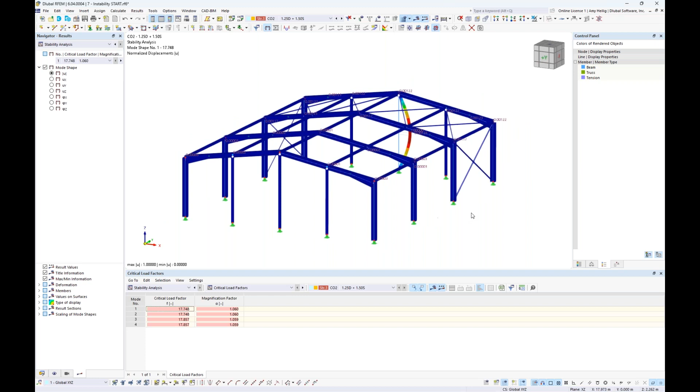Now looking at the first 4 mode shapes, we still have buckling here of these columns, but the critical load factor is now 17.748. So we could probably say that this failure of these columns is not a concern, because the structure can take on 17 times the applied loads from load combination number 2 before we would see it fail, as we show here within this first mode shape.

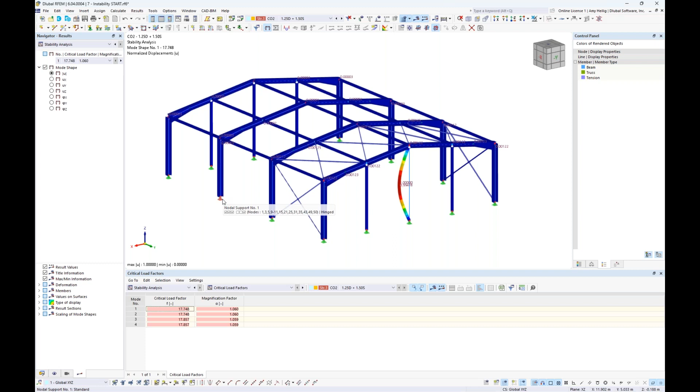So again, the structure stability add-on not only can carry out the buckling analysis of our structure, but we can also utilize it to help us with those modeling errors and instabilities.